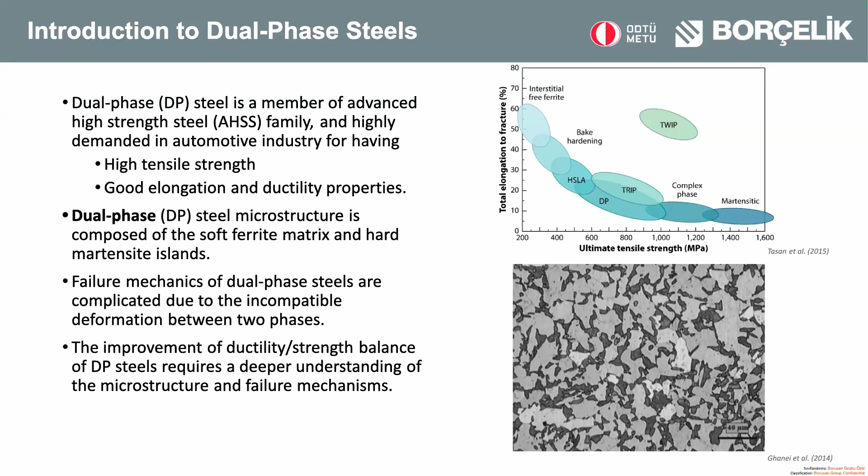There are lots of factors affecting the performance of the dual phase steel: the volume fraction of martensite, the chemical composition of the phases, and also the production techniques all affect the final performance of the final product. For example, when you produce your product in not an appropriate way, there will be a band structure of martensite. You can see from the publication, if there is a high heating rate, it will be favorable for band microstructure. There are two main reasons for this: mostly segregation of alloying elements during casting, but choosing inappropriate annealing parameters can also cause this.

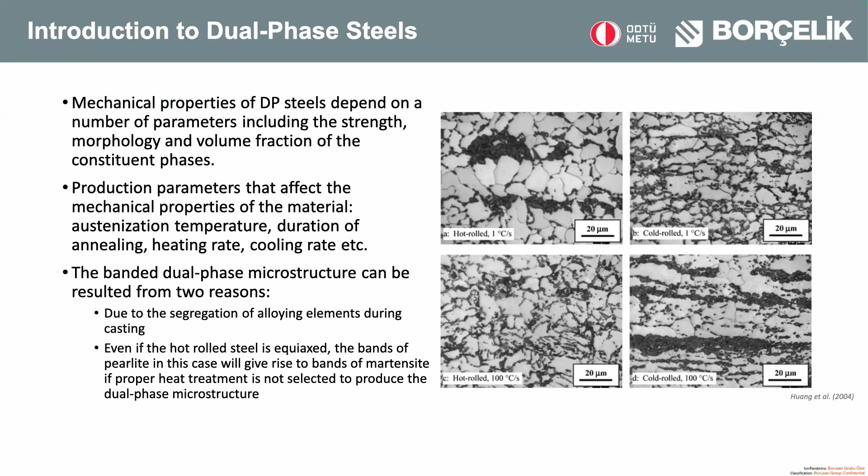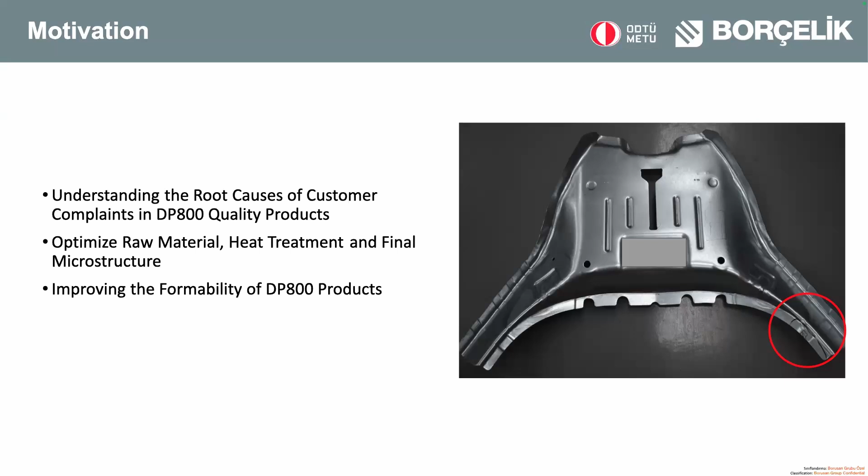Actually, this is the thing we suffer in Borçelik. There are sometimes problems with our consumers about the formability operations. So this study is important for us to understand root causes of customer complaints and also optimization of annealing parameters and improving the formability of DP800 products.

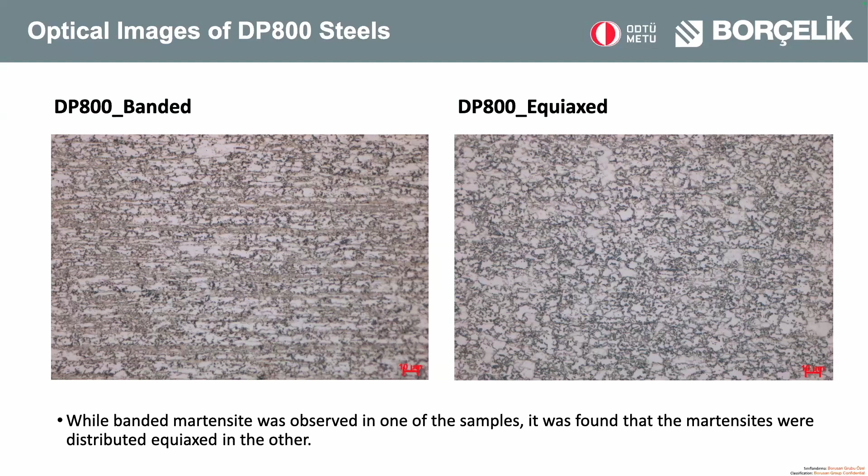So first we started to characterize DP800 samples. These are two different DP800 samples of ours. As you can see at the left side of the slide, the banded structure of the martensite. At the right side of the slide, the equiaxed, that's how we name them. So we did tensile tests on these specimens. The tensile test results are the same as indicated in the standard. We did tests in the rolling direction, and yield strengths and tensile strengths are quite similar, and also elongations are similar.

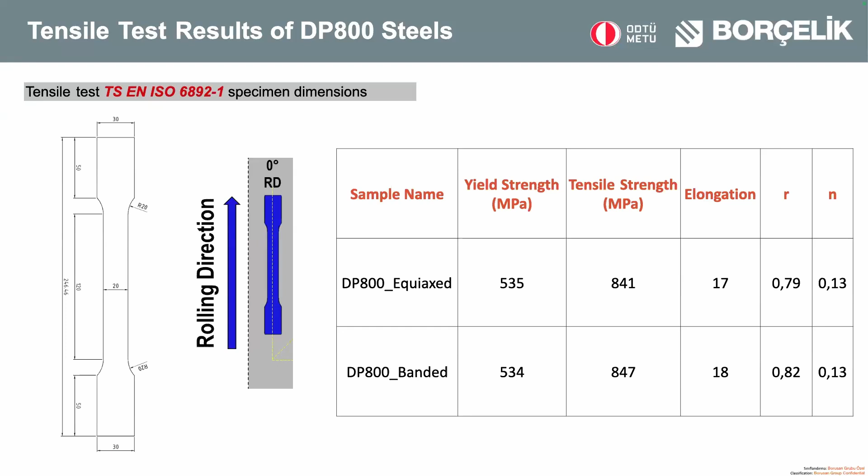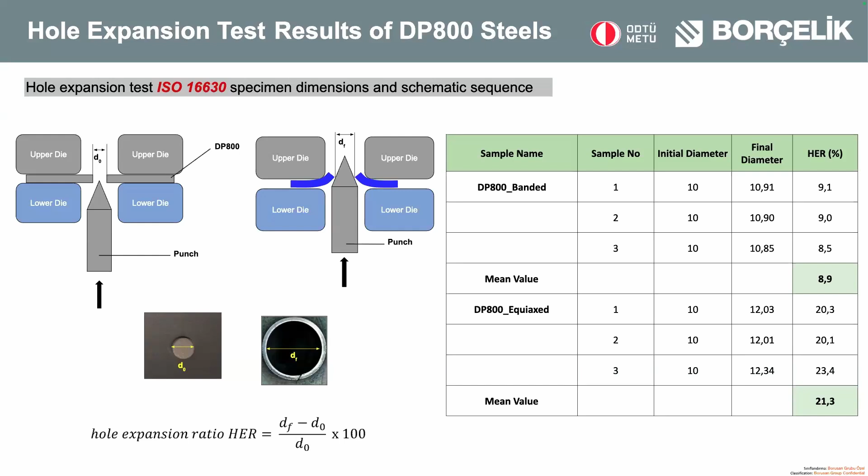To examine the other properties, we did a hole expansion test on these two different DP800 steels. The hole expansion test is basically done via punch. We first open a 10 millimeter hole, then we punch the material. When the outer crack and inside crack reach together, we stop the operation, and in this way we finalize our experiment. As you can see, the banded structure has a quite low hole expansion result compared with the equiaxed one.

And also, these are the FLC results of our specimens. There is not a big difference, but you can see that there are some differences. The DP800 steel with banded structure has low formability.

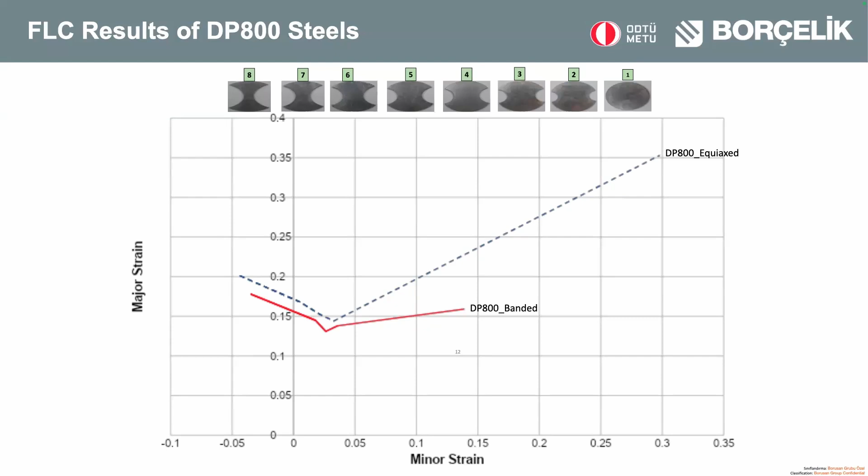So to understand the mechanics behind these results, we wanted to investigate micromechanical modeling. But to do it, first we need an application to convert microstructural images to the finite element model. So our coworker, Mr. Akbaş, designed an application for this, and we call it BORFA. This application basically transforms microstructures into Python code, then a finite element model.

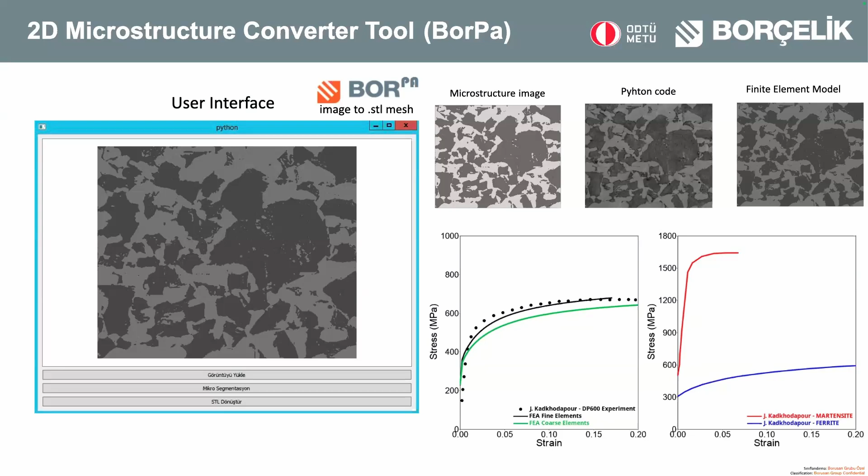So to investigate DP800 steel in Borçelik, first we have to calculate the flow curves of the phases. To do that, we use two different approaches. For the martensite, we use the approach from Pierman's paper. And for the ferrite, we use the approach indicated in the Lai paper. We calculate the carbon concentration of the martensite using Thermo-Calc. We basically give the program our annealing parameters, calculate the carbon content of the austenite, and we accept that it's not changed and remains the same in the martensite.

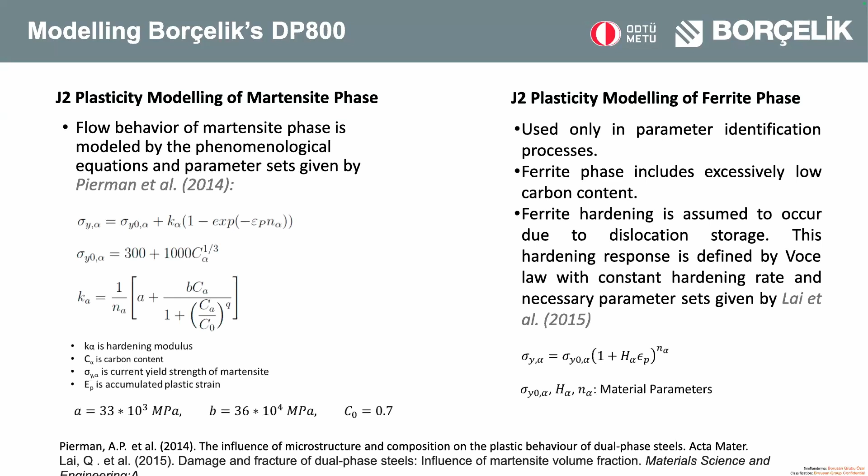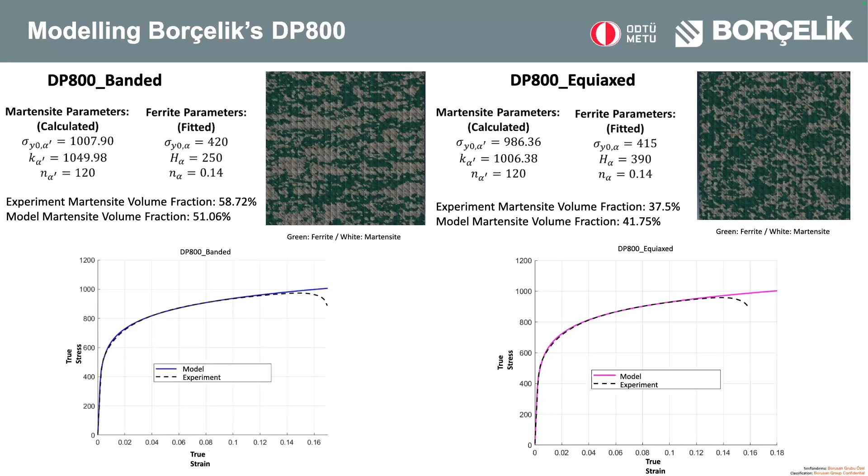So these are the data we approached during the curve fitting operation. We did it separately for banded structure and equiaxed structure, and we fit the model very well for these two cases. And then we did fracture analysis using the flow curve we achieved previously. To achieve fracture analysis, we use the element deletion method, and we give some settings for ferrite and martensite separately.

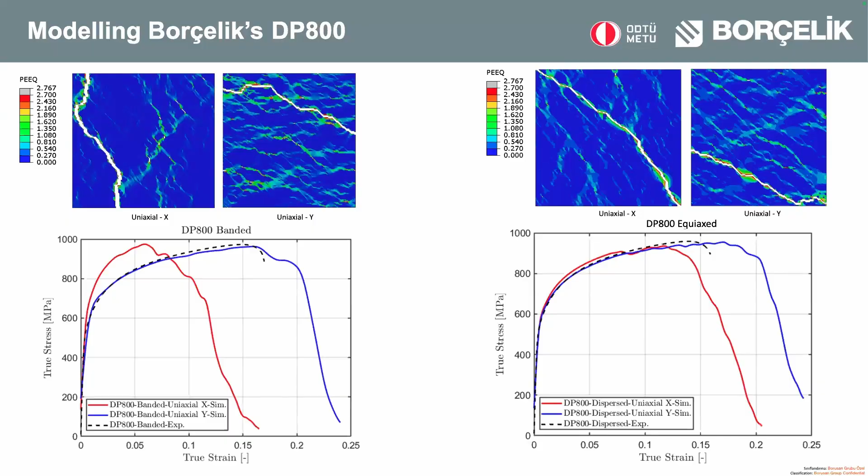So in this study, we did microstructure generation from an optical micrograph. We used these models to understand the deformation behavior of DP800 steel, and we calculated ferrite and martensite parameters for both of them. Compared to the equiaxed martensite microstructure, bands lead to premature failure, especially in the band direction.

For our future works, this is just the starting point of our study. We are continuing. We are planning to use this framework in the simulation of hole expansion, and further computational and experimental analysis will be conducted to link microstructure to failure mechanisms.